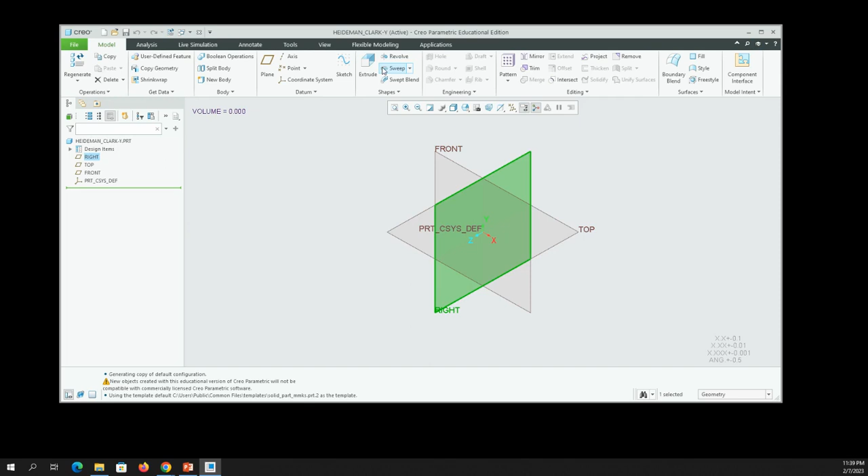So I opened up a fresh session of Creo. In this, I'm going to create a new part. We're going to call it our last name underscore Clark-Y. It's a part. We want to use the default template. We're just going to click OK. Okay, so we have a blank design. We're going to go into the right plane, select it, go ahead and do our sketch.

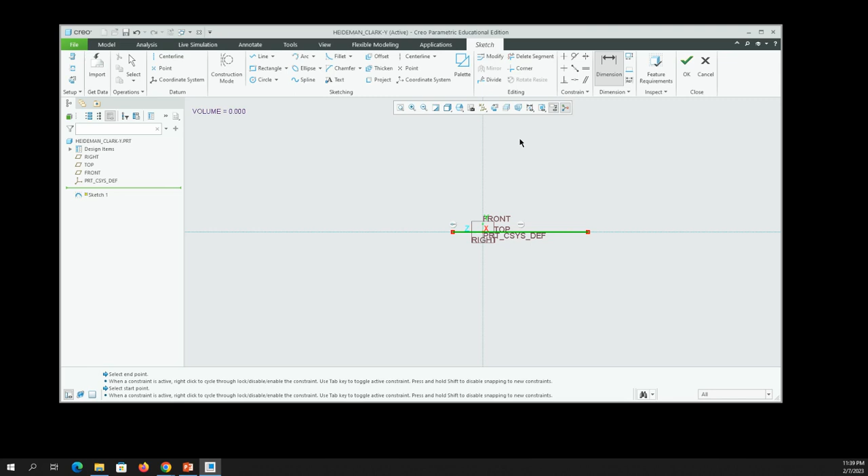Okay, for our sketch, we're going to do something just to give us some bearings to start with. So I'm going to add a line starting a little bit to the left of the origin, go over a bit more to the right, and finish our line. We'll dimension it. This is just so we have a reference. So what we want is we want this line to be 1 unit long. One of the nice things in Creo is that very first dimension, if we put it in without clicking anything else, it's going to scale everything to that. So notice it just snapped everything to that.

We can then go in and I want to do one more dimension. I want to go from this endpoint over to my front plane and I want to say that's 0.3. Okay, so there we are. Let me go ahead and move my dimension sort of out of the way. Okay, couple things that we want to do.

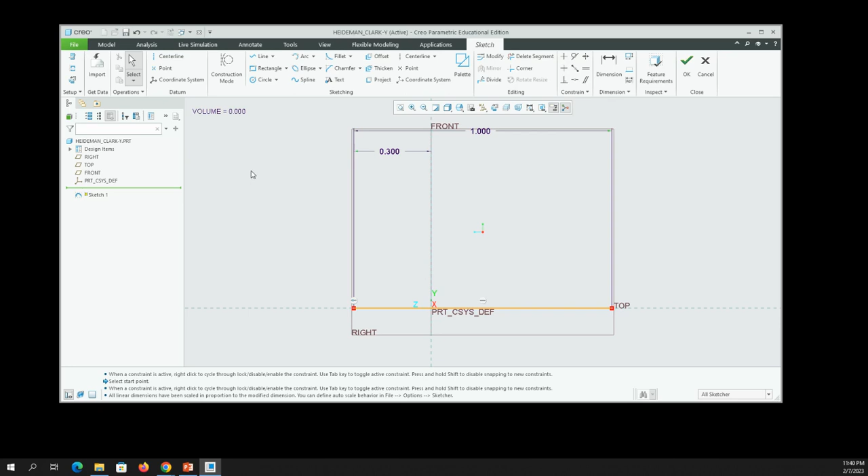So I want to add some splines in here. So I'm going to go ahead and add a spline. It's going to go from the start of this. I can add a couple of points, and it doesn't really matter. I could add 2 or 3 or whatever, or 4. So I'm going to add them from the front to the back, finish that spline. I'm going to add another spline on the bottom, and they can sort of look like anything.

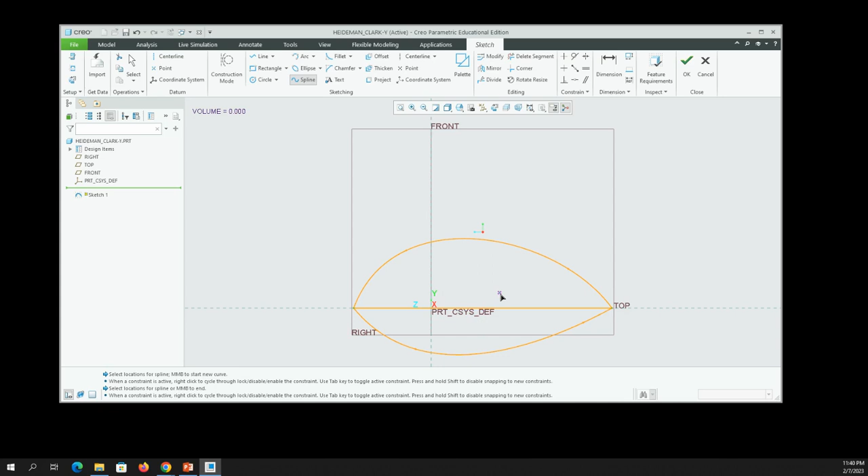Okay, notice my shape is not shaded in. Well, that's kind of a problem. So in Creo, we're not going to be able to do anything with this. So we're going to actually go in and just delete those couple segments. Oops.

Notice it shades in now. Sorry, I turn this. I'm going to go back to my right plane.

Okay, one last thing I need to do in order to update our splines is I need a coordinate system. So I'm going to go ahead and add a coordinate system in. It's over here on the left side. You can see coordinate system. I'm going to add it right at the start of that and click my middle mouse button. So I've got a coordinate system now.

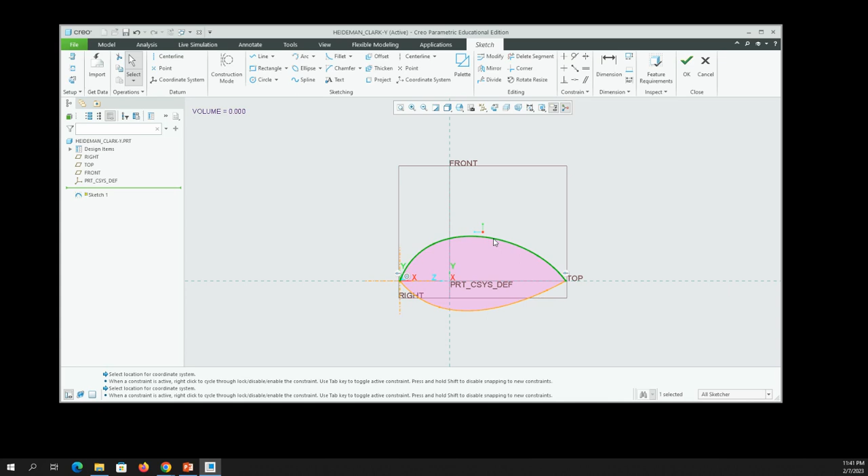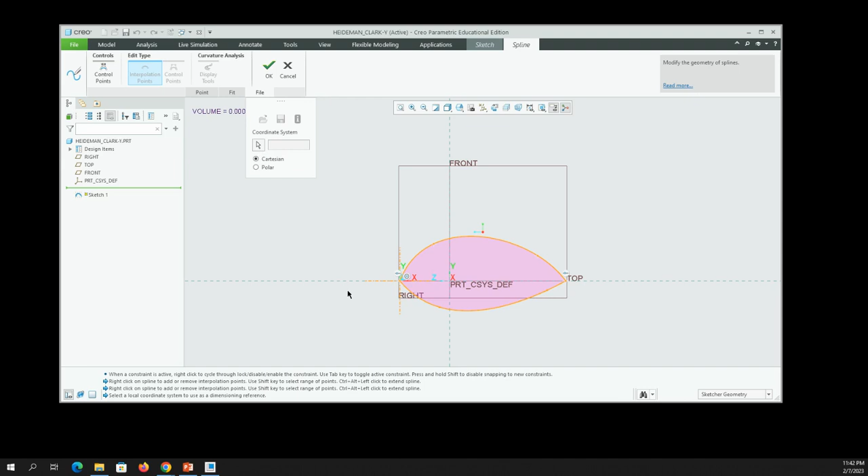So what we're going to do to edit our splines is I'm just going to double click on one of the splines. It'll give me a dialog here where I can actually go in and edit this. Our key is we want to not be a point or a fit. We want to go do a file. And first thing we want to do is make sure it knows where our coordinate system is. So we're going to click the arrow to select, and then we're going to click our coordinate system. And so there's my coordinate system.

I want to load my file. So I'm going to click read points from the file. It looks like a little file open icon. I'm going to go into my downloads directory where I had these. I had selected the upper set of points, so I'm going to click the upper set of points here, and I'm going to click import. Notice it does look for type PTS.

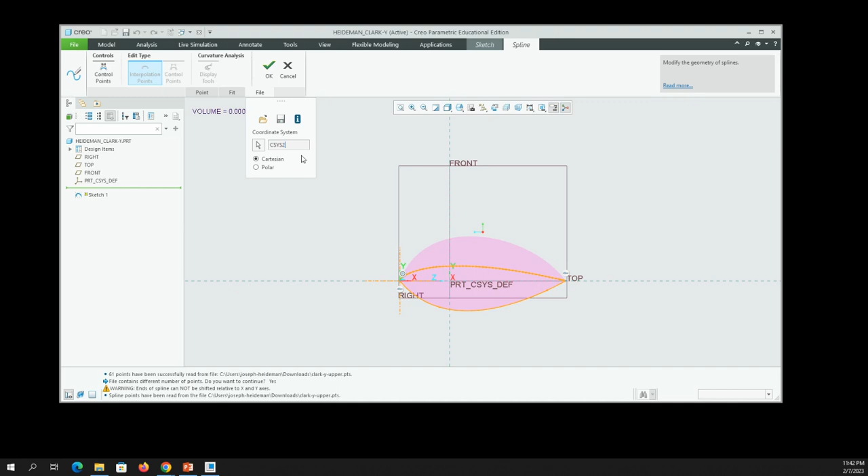File contains a different number of points. Yeah, that's fine. Let's go ahead and continue. So here's what it's going to look like. Oh, hey, that looks pretty good to me. So I'm going to go ahead and click OK.

And I'm going to do the same thing with this lower portion of my foil. Double click on it, opens up the dialog, click File. I need to select my coordinate system again, so I clicked it. I want to load in my set of points, so I'm going to go back to my downloads. I'm going to do my lower points this time. Click Import.

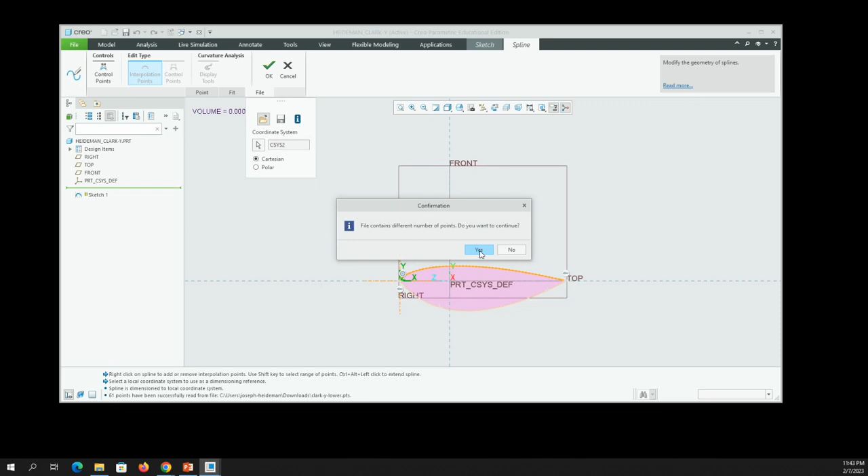Different number of points, yeah, that's fine. And here's what you can see it's going to look like. So at this point, yeah, that looks good to me. So I'm going to click OK. That's my set of points.

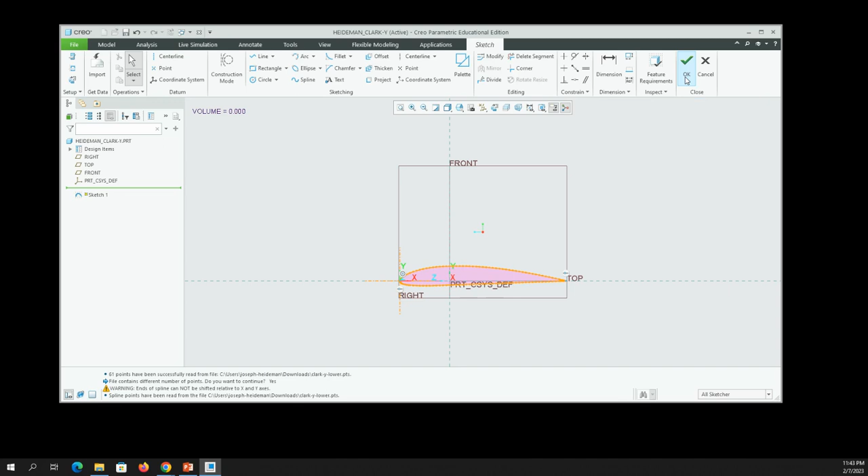Okay, one thing that I forgot to do as we started was to make sure that I was in inches, because I actually want to do this in inches today. So I'm going to show you how to change that. So we're going to click OK. So to change our coordinates, we're going to do File, Prepare, Model Properties. And I want to change these units from millimeters, kilograms, seconds into the Creo default, which is inches, pounds, seconds.

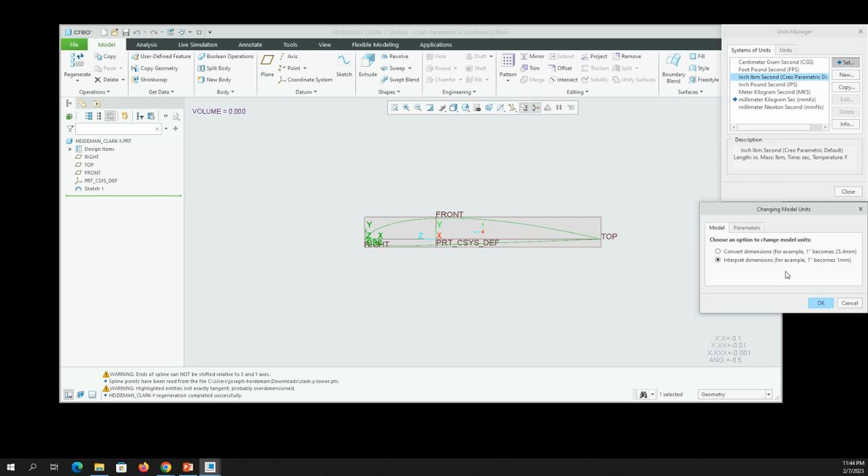So I'm going to go ahead and do a set. And I don't want it to convert the dimensions. So I don't want 1 to become 1 divided by 25.4. I want it just to interpret all the numbers that I put. So I want it to really be from 0 to 1 inch. So I'm going to say interpret. This is generally what you're going to want to do on all of these so that we don't do these conversions. And we're just going to click OK.

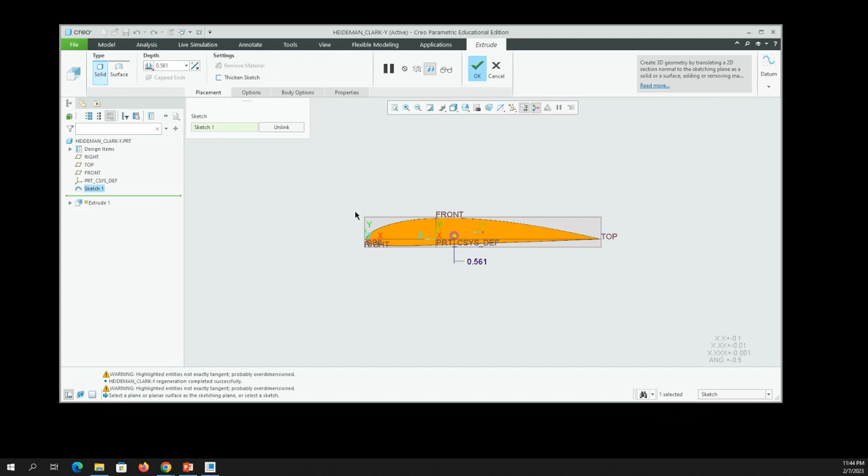And so at this point, we should be able to close that. We can see we're in inch, pound, seconds. So we're going to close that. Make sure our sketch is selected, and we're going to now extrude. So I'm just going to change the default orientation with Control D. Let's do it symmetric. And I really want to see something about 5 inches long for this foil. So let's go ahead and fit that again.

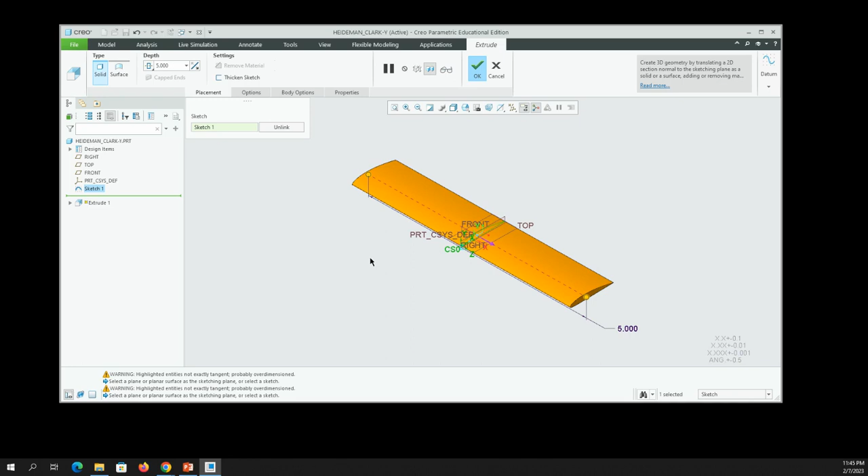So here's my airfoil. You can see it has that shape. It's 5 inches long. 5 inches is going to be basically as long as we're going to be able to do our 3D printing. So this actually looks good to me. I'm going to go ahead and click OK. I know it's all in inches, so 1 inch by 5 inches long.

All I want to do is save it. So I'm going to do File, Save as a backup. I'm going to go into my Google Drive, 10th grade engineering, all files, and I'm going to save this part. So at this point, we've saved the part.

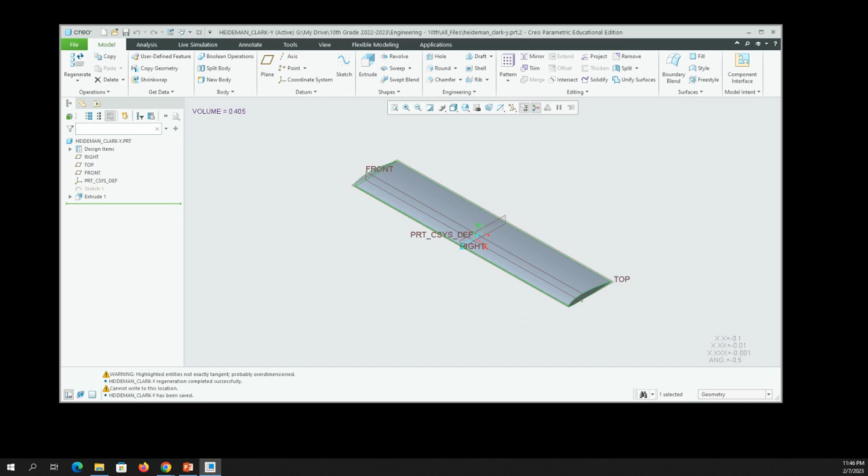We're actually all done. Hopefully you have success with this. And we'll look at how we can actually do something that's probably going to be a little more useful, but this gives us the basic concept of building an airfoil from a set of data points.